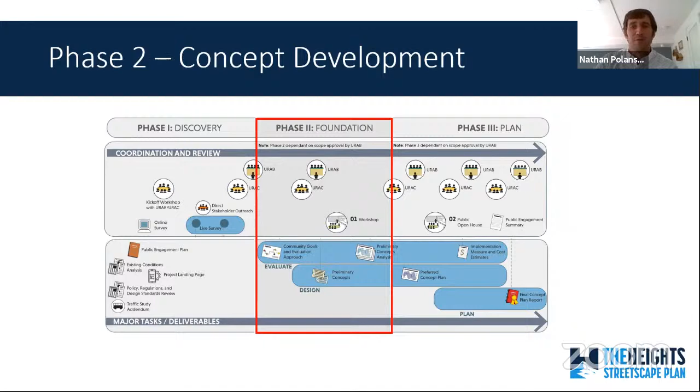As part of this, we're going to be developing concepts, reviewing those with the agency board and advisory committee and ODOT, as well as evaluation criteria, so that at the end of this phase 2 process we can have identified a preferred concept to move forward with in phase 3 when we're developing the plan. So what does that specifically look like for phase 2?

Our scope includes developing 3 concepts for the study area. We'll be developing evaluation criteria based on preferred performance outcomes based on project goals and conversations we've had with the community. We'll be meeting with the agency board and advisory committee to review those concepts and evaluation criteria.

After we've reviewed that with you guys, we're going to sit down with ODOT and review the same materials with them. We'll then work through an evaluation process based on the criteria, which will include a traffic study and traffic analysis that DKS is going to be doing as we look at level of service and moving cars from a traffic standpoint.

But we also are going to be looking at how comfortably and safely bikes and people walking move through the corridors and through the intersections.

We'll be reviewing that evaluation of the concepts with the agency board and advisory committee, reviewing that same material with ODOT, and then going out and presenting that information to the stakeholders in the community. At the end of the process, we'll be compiling that and making a recommendation for the preferred concept to be developed in phase 3.

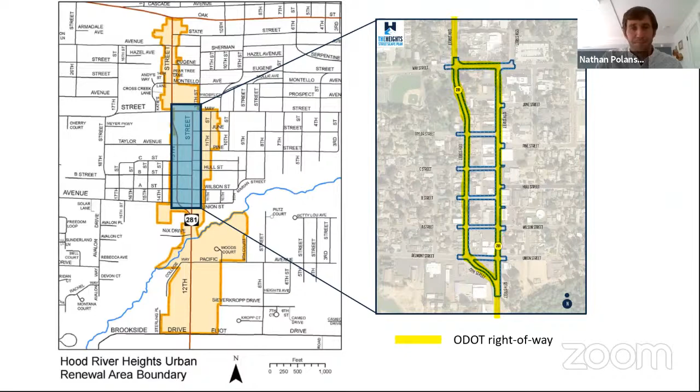281, 12th and 13th is an urban highway as designated within ODOT's highway design manual. It's a non-designated urban highway, so there's no special designation that goes with it. It's a district highway with no overlays. Other communities with a main street or downtown feel where the state highway goes through sometimes have special overlays called special transportation areas, but that doesn't apply here. It's also not a truck route. I know early on there were questions about how involved the freight community needed to be, and 281 is not a freight route.

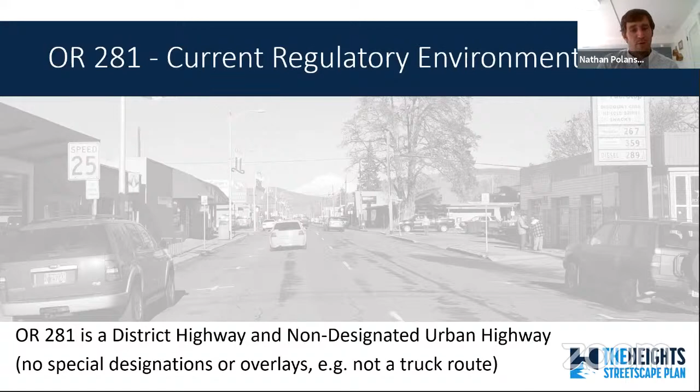So what does that mean from a maintenance standpoint? I know this question has come up before, but ODOT maintains the roadway, so they maintain the pavement surface, pavement markings, and basically curb to curb. The city maintains the sidewalk and street environment behind the curb, along with drainage infrastructure, the lighting, and snow removal.

This has been confirmed with ODOT. I know there was a question at one of our last meetings: is there something in writing, can we have something that formalizes that from the city's perspective? We've asked ODOT to look into that, so they're checking with their maintenance folks to see if there's something formal. Tara may be able to speak to that more if there are further questions, but this is both the city and ODOT's understanding of who maintains what within the ODOT right-of-way.

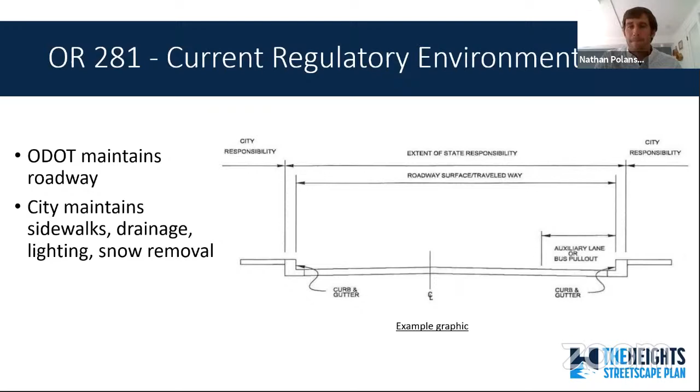Parking is something that came up throughout our engagement process in phase one. DKS has started doing a parking study—that was one of the last times we met, when we talked about the amendment to add the parking study. They were out there Tuesday, and I think again Saturday, taking parking counts to understand the existing utilization and demand.

The city's TSP also includes general recommendations for intersection improvements. At 13th and May and 13th and Belmont, the adopted TSP notes traffic signals would be provided at those intersections. At 12th and Belmont there are also some minor recommendations for improving that intersection, which is currently a two-way stop on the Belmont east-west movement. So that's what's in the city's current plan.

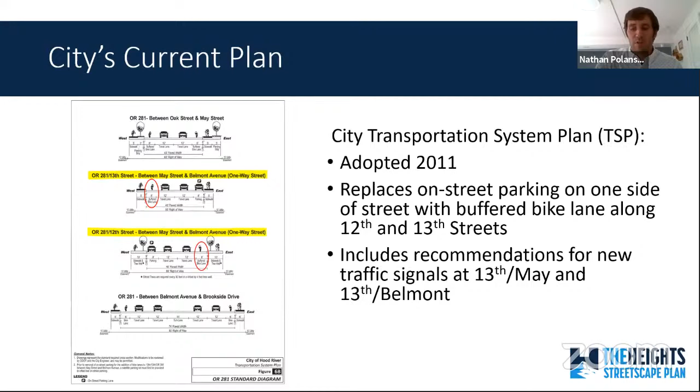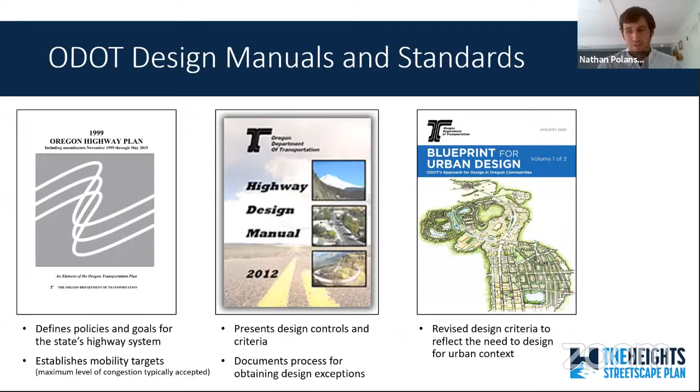The previous approach focused more on getting a special designation, going through an ODOT process to get that. I think generally, Tara could probably correct me, those had to go through the formal Transportation Commission process to the state. And generally the 2012 Highway Design Manual is less flexible.

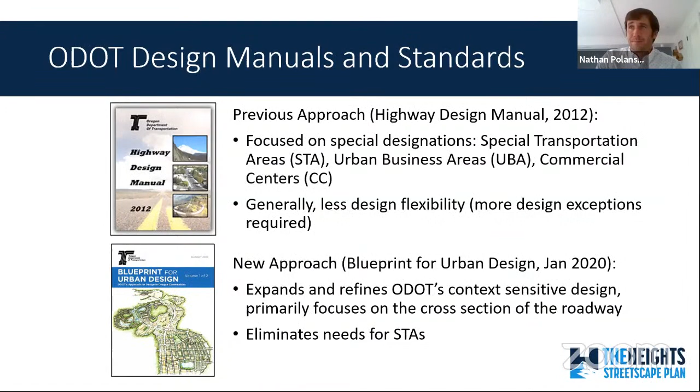So this new approach really focuses on designing for the land use context. It generally eliminates the need for special transportation areas that would probably apply to the Heights District, and focuses instead on the various land use contexts.

There's a downtown or central business district designation. There's also urban mix - let's see if I can get my cursor on there - so there's this urban mix. These are really the 2 land use contexts that we're looking at that exist today in the Heights.

There's also a commercial corridor, generally think of this as more big box frontages with a more multi-lane roadway, a residential corridor, suburban fringe, and rural communities. So the BUD, or Blueprint for Urban Design, outlines how land use informs design and makes recommendations based on that land use, different modal priorities, and the roadway function, to present refined design criteria that can be applied to develop cross sections in the design.

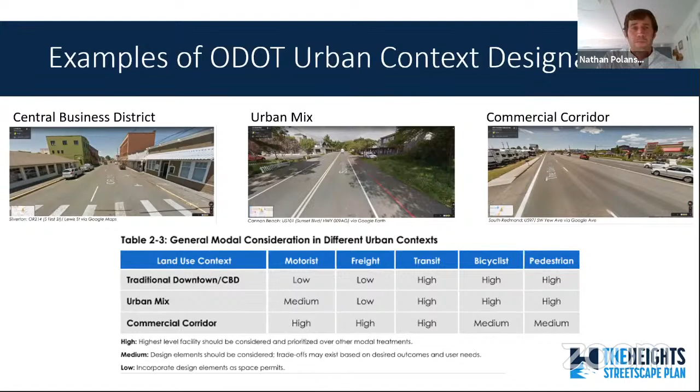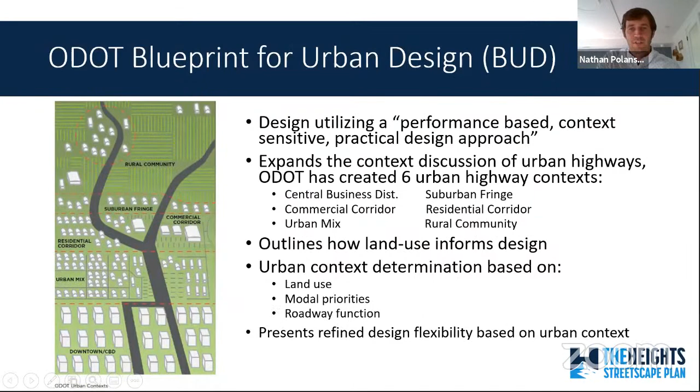So I'll flip back real quick to how you determine that urban context. This is part of one of the memos we included, looking at land use, modal priorities, and roadway function. Looking at the land use context - this was the first 2 pages of the urban context recommendation that our project team made with feedback from the city and delivered to ODOT.

When we talk about land use, we're looking at the setbacks from buildings to the property line - how close or far are buildings to the right-of-way line? Are they shallow, is there no setback with zero lot line development, or are they larger setbacks? We're also looking at building orientation - do those storefronts and doors get accessed from sidewalks on 12th or 13th, or are they on side streets?

One of the things we noticed when we looked at existing land use, which we know is planned and likely to change over time, is that some of the building orientation particularly along 13th was a little more focused on the east-west streets, particularly at the corners. We have relatively short blocks, so we did see some of that urban mix building orientation on 13th.

From a land use perspective, what's the existing and future mix of land uses? On 12th, there's not much mixed use out there now, but there's a desire to have mixed use along 12th and 13th in the future.

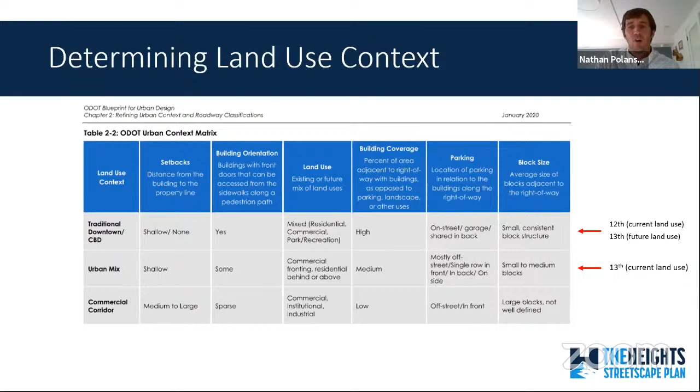This is similar information that was included in our recommendation memo. Taking that as the urban context for 12th, our recommendation to ODOT was central business district.

So Chair McBride, regarding your question on speed, from the ODOT blueprint for urban design you can see the target speed for these two different contexts that exist today along 12th and 13th Street—looking at 20 to 25, slightly lower than the posted 25 mile per hour speed limit, slightly higher on the urban mix.

Otherwise, across this table there's a little difference, but column 3—travel lanes, turn lanes, shy distance, medians—all of that vehicle information and guidance is the same across central business district and urban mix.

You start to see the difference in bicycle facility guidance. For the central business district, it starts with a separated bicycle facility, whereas urban mix starts with separated but considers the roadway characteristics.

Sidewalk guidance is similar, and target pedestrian crossing spacing is similar. This goes back to recent crosswalks that have been removed—I believe at Hull, there are one or two intersections with no crosswalks, which increases the distance between pedestrian crossings.

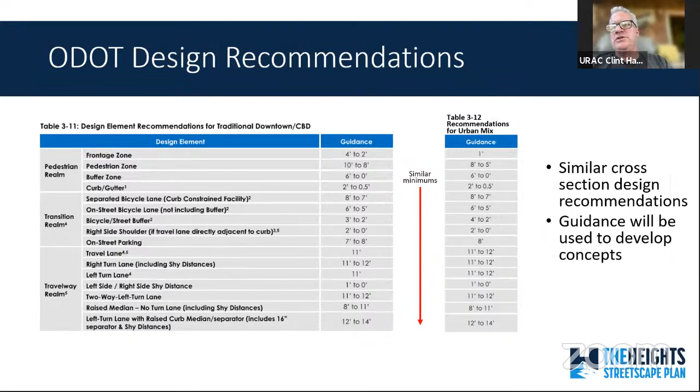Correct. One of the things is that you can post something, it doesn't matter where you are. If you post the speed at something that doesn't reflect the space and the design of the street that's there, you're going to get people that feel much more comfortable going faster. And when you're in your car, that might be just fine, but if you're someone that's out there walking across the street, trying to move through the corridor with your kids, your dog, your family members, on a bike, it really takes away from your experience.

So all of the tools that we'll be looking at as we develop design concepts, we'll be making sure that we're looking at dimensions. And because we've got 60 feet, we're going to be on that minimum range for basically everything. That will help slow cars down, in addition to any other more formal traffic speed change that might be desired.

Nathan, I have another question. On the pedestrian realm - pedestrian zone and buffer zone - are both of those components of a sidewalk, or what do those terms mean?

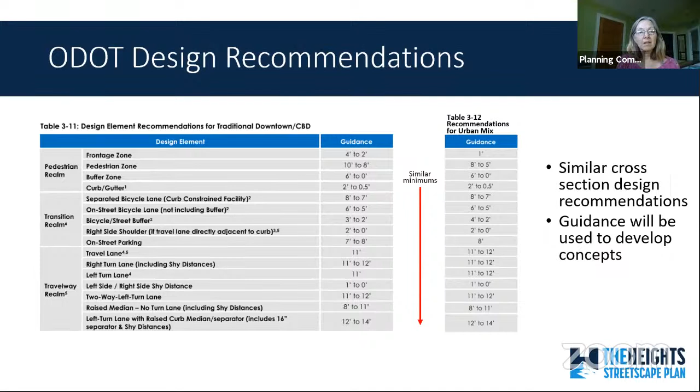Yeah, thanks for asking. I'll walk through this - generally the top of the table goes from the right of way towards the curb. The frontage zone is that space that's right at the face of the building. Think about it as where you have potentially some shy distance, or in the downtown environment, people might have sandwich board signs out, or some things they're selling on the street.

The pedestrian zone is really the through zone for people walking along the corridor. The buffer zone is the setback from the roadway - in some places it might be along next to parking, some places next to a bike lane, but it's that setback from the roadway. The curb and gutter is, I think, sort of self-explanatory, and depending on speed, state highway requirements tend to want more space - the 6-inch might be just the vertical curb, whereas the 2-foot would allow for a curb and gutter, part of the roadway. Does that answer your question?

Yeah, thank you. Hey Nathan, I just have a quick note on the speed zone stuff - I couldn't get to my mute button fast enough earlier. If any of you have gone through a speed zone change request with ODOT in the past, I know about 1.5 years ago they changed their process a bit. The biggest change is before it was largely based on an engineering study - they do a speed survey, and they were really targeting the 85th percentile speed, so the speed they were going to post it at was going to be towards the higher range of speeds that were out there.

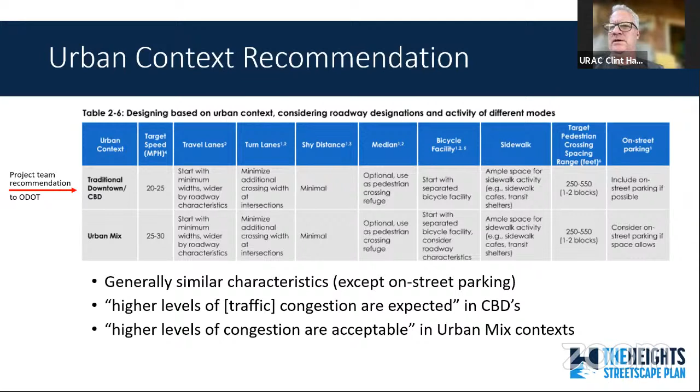So currently, with the parking on 12th and 13th, there's no parking that doesn't require backing, unless you're the first person there. Yeah, you hit the nail on the head. We also don't like parallel parking all that much either.

And I'm wondering if we still have two lanes of traffic moving, that makes backing a little bit safer, easier, I would think. So maybe that would be part of the consideration as well, but I don't know.

One of the things I've seen in the state design manuals is where there's angle parking, they tend to want wider lanes than are typically needed on a main street type environment, to allow additional space for that maneuvering. They expect a wider travel lane next to angle parking than you probably really need in an urban street setting. And that's one of the things that with a 60-foot right of way, you're really confined by.

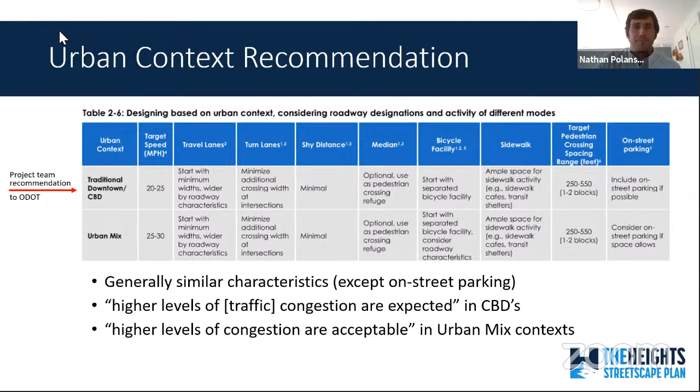Any other questions on any of this so far, or even more detailed questions looking at what these different design elements are?

One of the things they don't have on here, what ODOT refers to as the transition realm, is the on-street separated bike lane. One of the things I know we will be looking at are two-way bike facilities. For those, we'd likely be looking at NACTO, the National Association of City Transportation Officials, an organization that started probably 7 or 8 years ago, developed to provide design guidance to cities, to allow more tools in their toolbox for designing for bikes in urban areas, recognizing that the state highway level AASHTO design guides took a really long time to update. So we'd be looking to the NACTO Urban Bikeway Design Guide for dimensional cross sections for cycle track dimensions, and what is the minimum separation from the roadway, what's the separation from sidewalk if it's something that's at sidewalk grade.

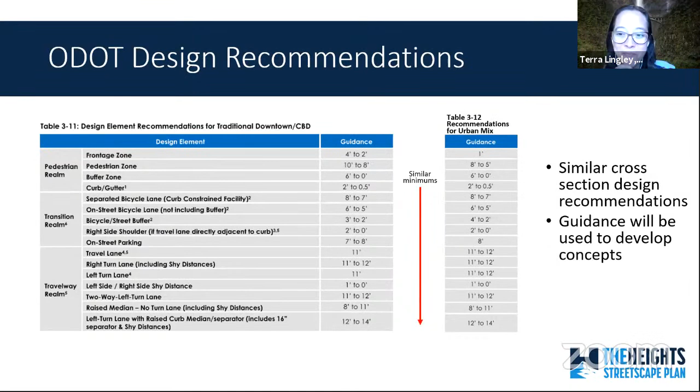Yeah, sorry, it's been sitting in my inbox for a while. Yeah, we concur with the CDD. So, breaking news, sorry for the delay on the response there. Great, no, thanks for chiming in with that, Terra. That's what we were kind of hoping for and expecting on a previous call with Terra, and it's great to get that formal concurrence.

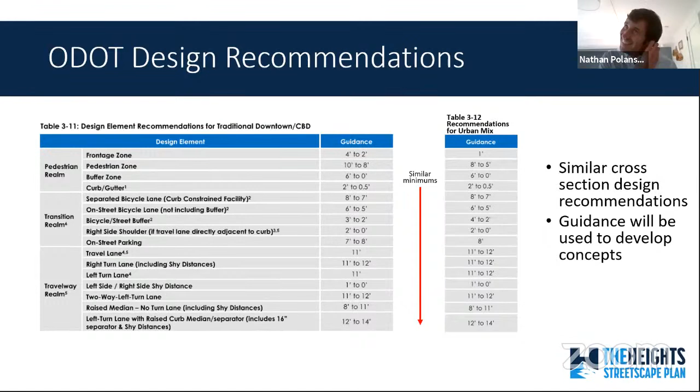All right, so looking at the design process. We've gone through and identified the local context, and established project goals. That was phase one. Terra has just confirmed our urban context designation from an ODOT manual standpoint.

Our next steps are to start developing preliminary concepts and evaluation criteria based on goals and the intended outcomes or performance categories. We'll use that evaluation criteria to evaluate the concepts.

An important next step is identifying potential design exceptions that require ODOT approval. As we develop concepts and present to the agency board and advisory committee, it's important everyone is clear on what is following ODOT standards and what is not, and how many of those things we're expecting, and how that will impact ODOT approval process and timing.

And then after having those conversations with ODOT and going out to the community to get feedback, we'll be identifying and developing the preferred alternative.

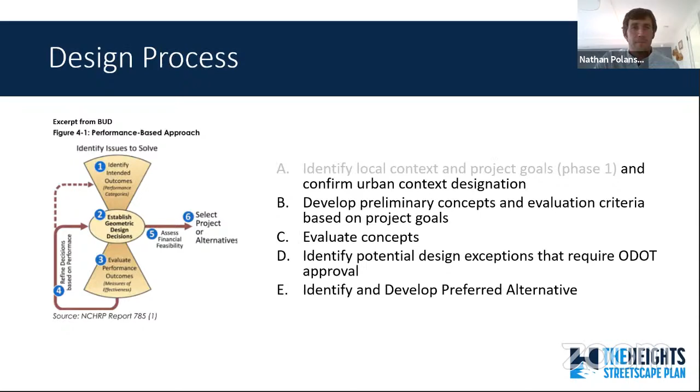So the evaluation criteria are going to be specific to our project and to the Heights. We don't want to copy evaluation criteria from a different project, community, or state highway elsewhere. They'll reflect the project goals and desired outcomes documented through our stakeholder conversations, the public feedback from the online survey, and our conversations with the board and advisory committee. There'll be a combination of both qualitative and quantitative criteria.

DKS is going to be doing traffic analysis, so we'll have that quantitative data, but a lot of it may be qualitative.

An important part of that is making sure, as we're presenting to everyone on this call as well as the general public, that these are easy, generally understandable evaluation criteria. We want to make sure people can understand and provide feedback on those things.

As we're looking at concepts 1, 2, and 3, we want to be very consistent and objective in that methodology. It's very important we pick evaluation criteria that will help differentiate between these three, because we don't want a bunch of criteria that score them the same and don't lead to productive conversations with stakeholders and folks on this call.

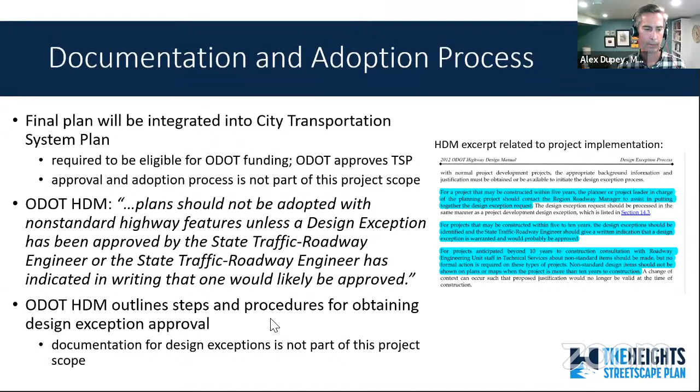Can I ask another question along those lines? I'm wondering about those east-west streets. So this project you're working on will design a lot of the features on 12th and 13th, but designing them on the side streets would be something the city does - is that right? Or is that incorporated into this project, because it's between those two streets?

We're primarily, from a scope standpoint, focused on the 281 couplet, but recognizing the way circulation and traffic patterns - not just vehicular but people moving through this corridor - those east to west streets become critical to the Heights as a district. So we are looking at those; there might be a slightly different level of touch that we get into, but it's definitely something we're doing.

And then a second question - the whole timeline plan for this whole project, what is that? We're probably looking at about another 8 to 12 months. The phase one went longer than we had planned. I think when we started this, we were thinking 12 to 15 month project. It's August now, we're early in phase two. There's a combination of factors that have led to that, but I would hope to say we're wrapped up in 8 to 12 months-ish.

One of the things we need to do is go back and look at the timing for ongoing public engagement, making sure that we're engaging with stakeholders in the community at a smart time. But we also don't want this to go on very long. It's important to keep the momentum, but that's the general time frame.

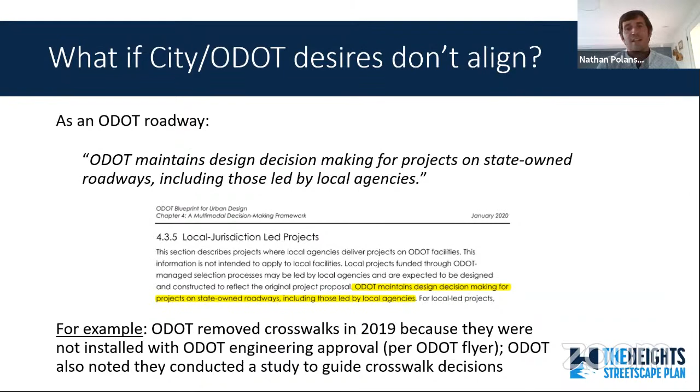So for our project, what do potential scenarios look like where the city and ODOT have a different take? That's something that could be very high level, project level. We were just talking about the traffic considerations or those mobility targets not being achieved that are set in the Oregon Highway Plan.

And so there is a process where you can set an alternate mobility target. It has to go through and be adopted by the Oregon Transportation Commission through a facility plan. There's a statement that talks about that process. To allow that, you have to look at all the feasible options before choosing a new target. So that's a high level thing that could say, oh, this doesn't really work for us.

Crosswalks at desired locations are not supported. There could be a potential where ODOT's stance, even with the fully envisioned corridor, takes a different stance on crosswalks, or the parklets conversations are not allowed. It might be something at a design level where there are a lot of design exceptions that stack up.

The TSP does note that the traffic signal proposed at 13th and May in the city's current TSP requires a design exception. We talked about angle parking would require approval. So there could be a point where there are a lot of design exceptions that become concerns from ODOT's side.

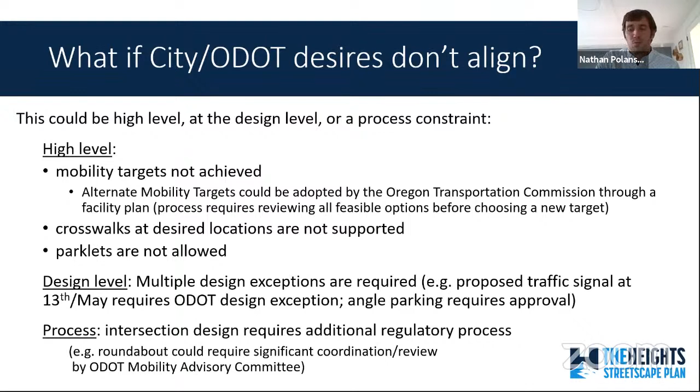So if for some reason these things start to become too many hurdles for the city to take on, then what is the alternative to that process? What we talked about early on in that first contract approval is potentially the idea of a jurisdictional transfer—rather than having to follow state highway regulations and design standards, it gets transferred to the city, and the city would have jurisdiction over it just like they do their other streets.

Typically this happens with some new level of investment. The city gets kind of a brand new road, gets improved facilities. The benefit to ODOT is they're no longer on the hook for maintaining that roadway in the future. The pavement, the striping - it removes the liability from them.

There was the Oregon Active Transportation Summit earlier this year. There was a program session talking about jurisdictional transfers, and as part of that presentation, someone from Oregon Metro presented a study of completed highway transfers. I've included a link in the slides to that study.

One of the things they looked at was historically why agencies pursue a jurisdictional transfer. There were three themes that arose: incentive and mutual benefits, roadway maintenance and design standards, and consistency with current land use. That third theme, consistency with current land use, is one that I think ODOT is expecting to go away with the new Blueprint for Urban Design manual.

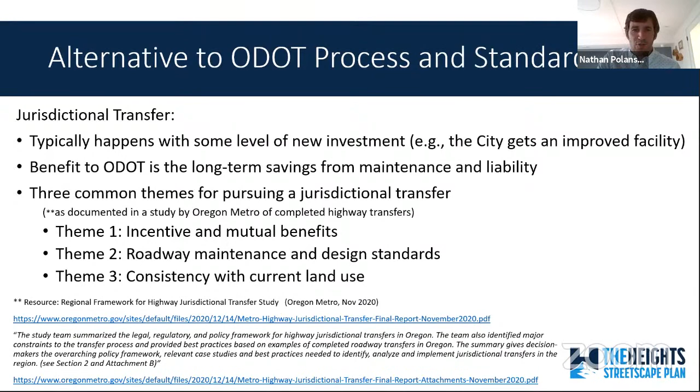So what do those three things mean? From that document, I grabbed their description, and I'll just read these for the three common reasons for jurisdictional transfer. So, incentive and mutual benefits.

Initiated when the state and local jurisdiction have incentive to execute the transfer. Case studies indicate local jurisdictions are motivated by the community's desire for an improved roadway, and when a change in roadway function will prioritize non-automobile travel modes to improve traffic safety or support desired land use outcomes. Transfer is easiest when funding is available, for example through state legislature, to upgrade the road prior to transfer.

Frequently, transfers reduce maintenance costs and liability for the state, providing long-term financial incentive for the state to complete a transfer. Once the incentives are established, the state and local jurisdiction are motivated to complete the transfer by the prospect of mutual benefits. Because the jurisdictional transfer process is grounded in negotiations, transparent and frequent communication ensures both parties receive some benefit - financial, or an outcome that supports the agency's mission. So I'd say this generally aligns with some of the things we're talking about here for the Heights. Again, these are direct quotes from this report prepared by Oregon Metro.

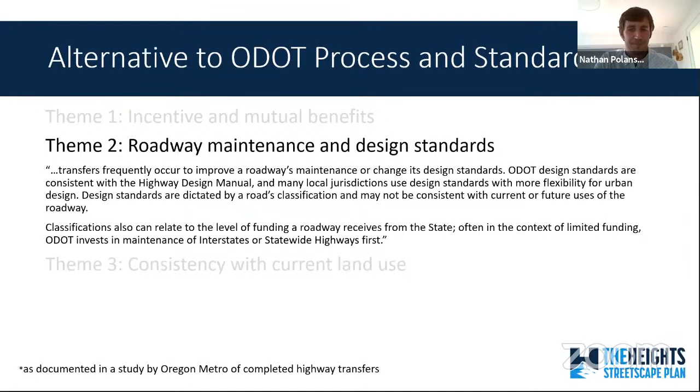And then the third theme: consistency with current land use. Transfers often occur to update physical conditions of a roadway, and also occur when a roadway's function is not consistent with current and future land use. Transferring road ownership to a local jurisdiction can help support development or redevelopment by aligning transportation and adjacent land use. The transfer process itself can facilitate development when the negotiation results in a design that supports adjacent land uses. Negotiation also leads to creativity and compromise, resulting in an outcome for the roadway that may have otherwise been undiscovered.

I know jurisdictional transfer is something that has come up. I think some people see it as more of a potential outcome than others. Our plan is to work through the design process and the blueprint for urban design with the flexibility that's there. I thought it would be good to introduce this as a discussion point, and to see historically why other cities have pursued a jurisdictional transfer.

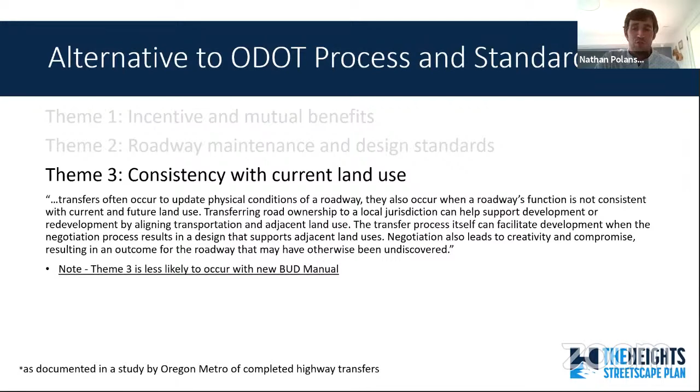So we've done a jurisdictional transfer. We did it last year when we wanted to put parklets down on Oak Street, and we couldn't do that unless we did the transfer. We looked at the heights at the same time to some extent, but quickly took it off the list, really because the condition of the road was so much worse than anything we would be taking on Oak Street. ODOT also agreed that when some of the crosswalks needed upgrades on the side streets that crossed Oak, there would be some compensation to the city. There's just so much that needs to be done on 281 on the heights that the city didn't want to take on that amount of maintenance and reconstruction. So that's why we took it off the list, to quickly get it done on Oak Street so we could allow the parklets down there last winter.

Yeah, that makes sense. One of the things in going through that Oregon Metro document is that it details pretty exhaustively the process of developing the financial assessment, which is definitely not MIG's expertise or background. So we'd look for guidance on process and timing, and we would look to ODOT and city staff to guide those discussions.

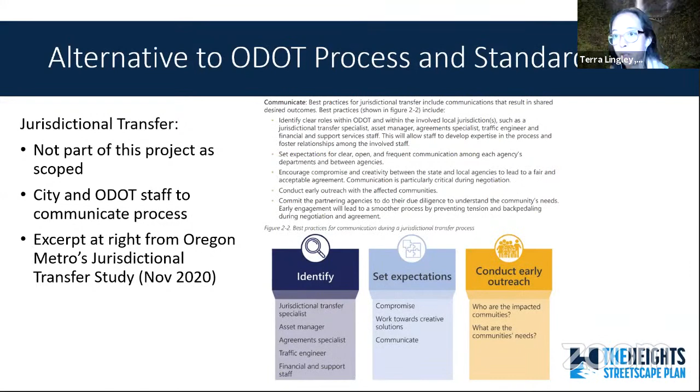Yeah, if I may jump in, that's why I'm here tonight, and have been involved in the past and will continue to be involved in the future, is to take back to the decision makers at ODOT and see where it could fall. Is this a relatively easy exception process? Does it fall within the budget, or does it not? And then there's a negotiation that needs to happen. So I'm kind of the through line for all of that, to make sure those conversations are happening early and often. What I'd hate is for you all to go through this long process and come to the end and realize nothing is implementable, or it's a really long process. I'd like to raise the issues, like maybe we could get an exception, maybe we couldn't, and just raise that flag as the options are being developed and presented to you all.

Yeah, all design exceptions are not created equally. Some can be very simple and easy to take care of. The Highway Design Manual outlines the process and the documentation that's needed generically to go through that process, and they realize that happens frequently. So that's something we're expecting, not necessarily to do that documentation as a part of this scope, but the idea that there are design exceptions that would need to get approved.